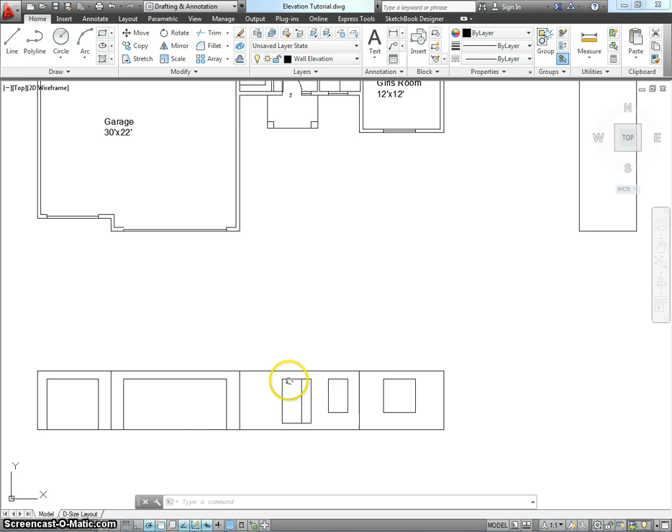Our next step is to start drawing our roof. So what we're going to do is create a new layer, and we're going to call this our roof plan. I'll make it a magenta color, something a little bit different.

So I'll go to my roof plan. Now what I want to determine is what I'm going to do with my roof, and what kind of overhangs I'm going to have. In this case you determine do you want 1 foot overhangs, no overhangs, 2 feet overhangs, 18-inch overhangs - it's kind of up to you. I'm going to go a little bit bigger, I like larger overhangs, so I am going to do a 2 foot overhang.

So when I'm offsetting this, I'm going to click a layer - I'm going to do my current layer that I'm on. I'm going to do 2 feet, and I am just going to break this out.

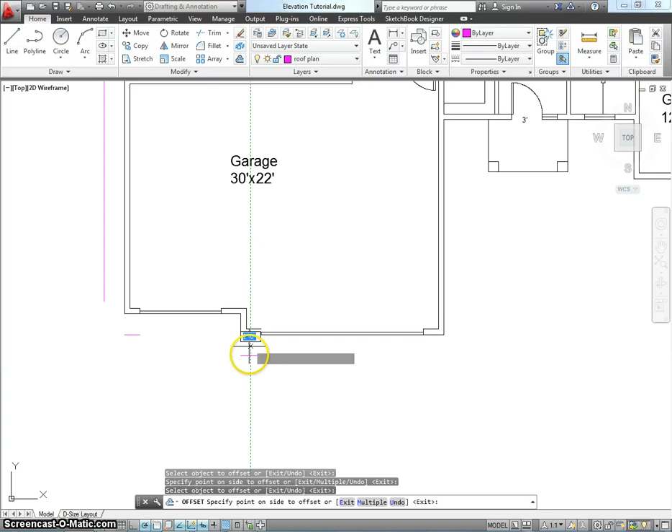Let's see here, I've got one here. There's one, let's see what else we have - so we have front, back, and then over here, over here, over here. Let's see, we've got right here, right here. I'm going to put all these together in a second here, so I think I've got what I need.

Yep, so I'm going to go ahead now and actually fillet these, make sure I have a 0-radius fillet. I'm going to do multiple, zoom in here, fillet these two together.

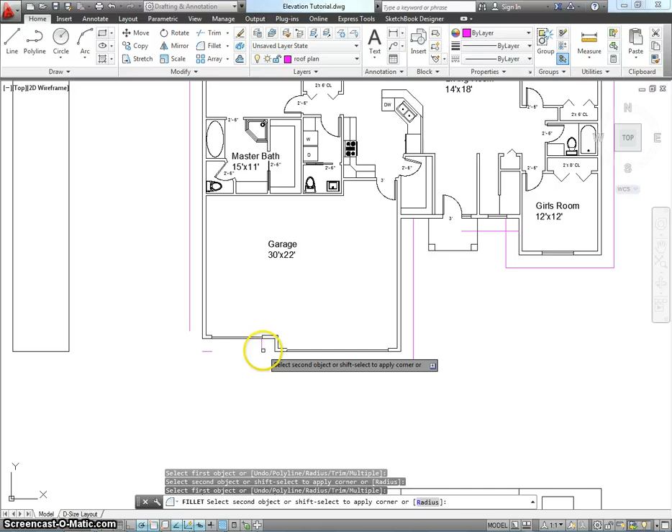Alright, now I've got this, I'm just going to extend this line over, and do the same thing over here. Okay, so now I kind of have my 2 foot overhang that I want on all sides. It's a little bit bigger naturally about right here and right here - I'm kind of taking a shortcut and just saying I'm going to leave that.

So now for my overall house, what I want is a roof slope that actually goes from here - it's a gable end - from here to this line right here, so from here to here. So that is actually where I want to draw probably my first ridge line.

So to do this, I'm going to figure out what my distance is between these. So I've got 34 feet and 7 inches - I'm going to write that down, 34 feet and 7 inches. Alright, so now I'm going to offset, and I'm going to offset something half of that, so 15, 16, that's 17 feet and 3.5 inches here.

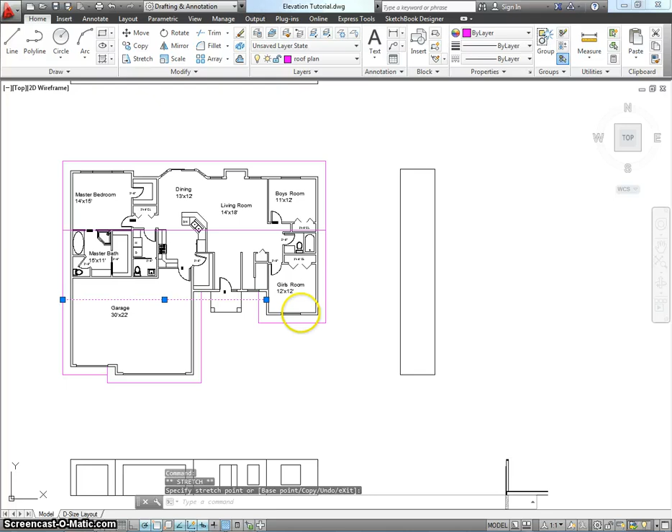So I'm going to go 17 feet and then 3.5 inches, and I'm going to go from here to there. Okay, so essentially what I have now, if I extend this over to here, and I extend this over to here, is I have my gable roof.

So you imagine folding a piece of paper, and this is the fold line that's going through - you're folding in half down the long way, and that is what my roof plan is going to look like on that side. Now what I'm doing is I'm actually going to be adding in some gables that intersect to my ridge lines that create kind of a cool looking effect here.

So let's see here, what I'm going to do is my front here - this is a pretty easy one - goes from here to here. I actually want my ridges to meet up here, or at least that's my first idea, so I'm going to have one go from here to here.

Now this is a very important corner now, because this is the end of our roof and this overhangs a little bit. So what I'm going to do here is actually bring my valley line from there to right there.

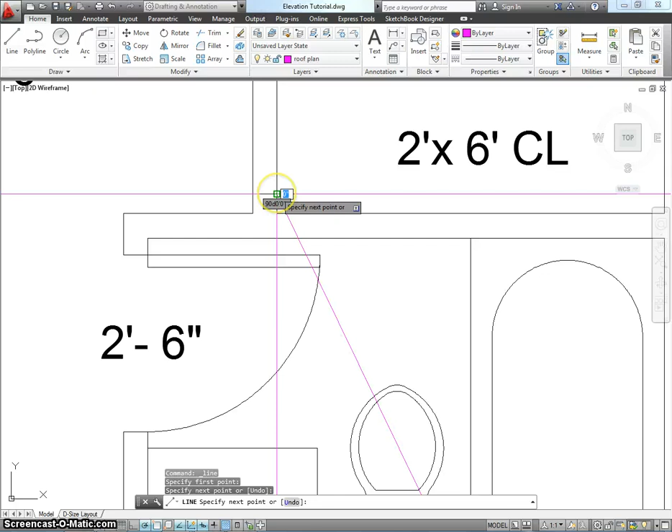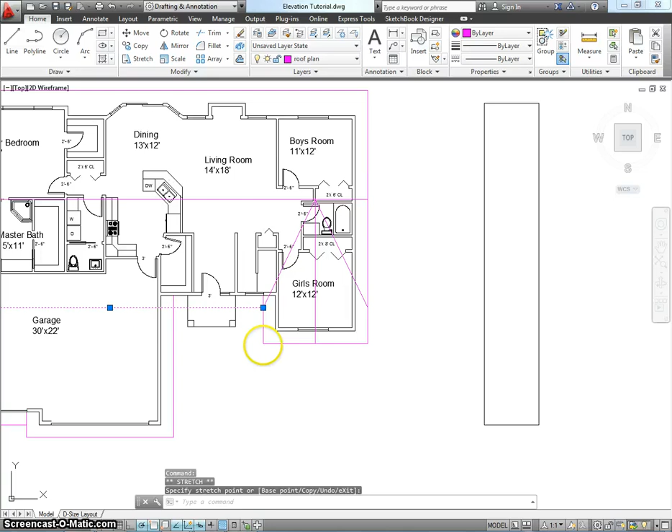Then I'm going to bring my valley line from right here to this side. And if I just move this line back over here, now I have my roof and I have a gable that intersects where my ridges are at the same height. So naturally, if you look at it, my run on this side is going to be less than my run on my overall gable. So this would actually be a larger pitch, but I wanted to keep things roughly the same size.

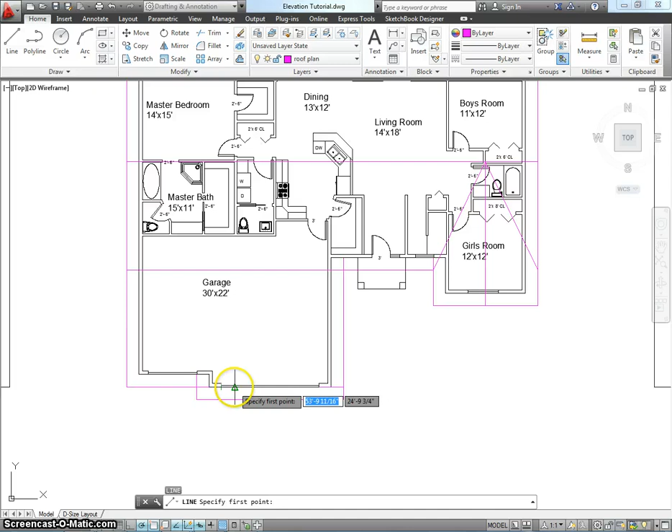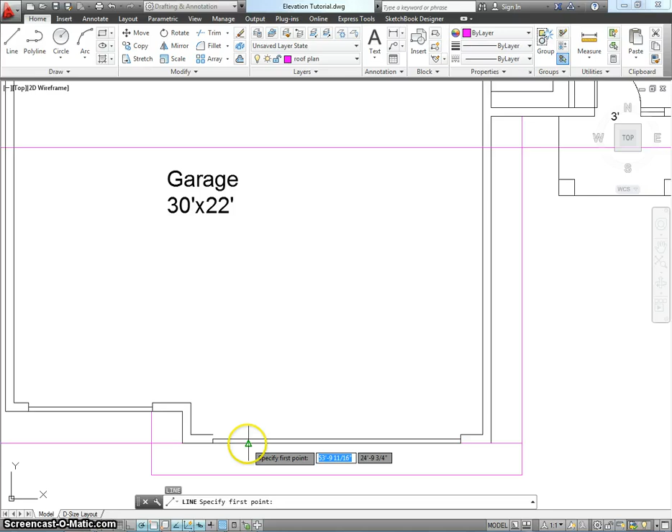So now that I have that, I'm going to do the same thing over here. What I'm going to do is imagine this line goes all the way through. Now that I have that line, I am going to bring a ridge line once again all the way through. Make sure this is 90 degrees. That's not 90 degrees. Try that again here. Alright, there looks like 90 degrees.

So there's that, okay. That's going to be my ridge line for that part of the roof. And what's going to happen is this is going to come down also and intersect with a few things. And then I have this portion right here, and this portion I'm going to do the same thing. This is actually going to go back to about right here. So what I have here is this is going to go up, then it's going to go down, it's going to meet there. This is going to go back.

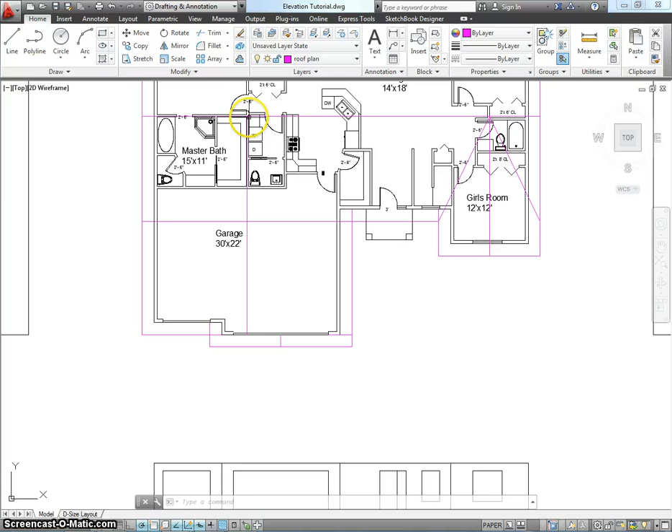Now what I have to do is figure out where this is going to end for me. So I'll have a valley line that comes down, and my valley line here is once again going to come down to where my overall roof, my large overall gable roof, ends, which is going to be right here. And then I'll have another one that goes from right here to that section.

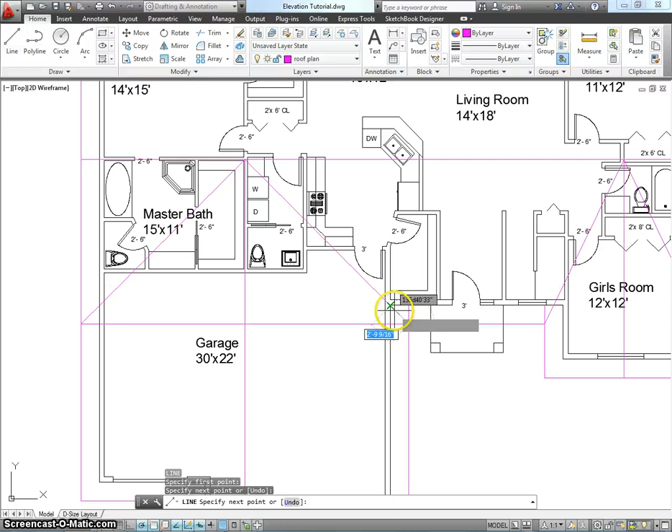Right there. So now what I have is my overall gable. I have a pretty large one that goes over the roof, a little one that goes over this portion, goes back to the wall of my garage, and then I have this one over here.

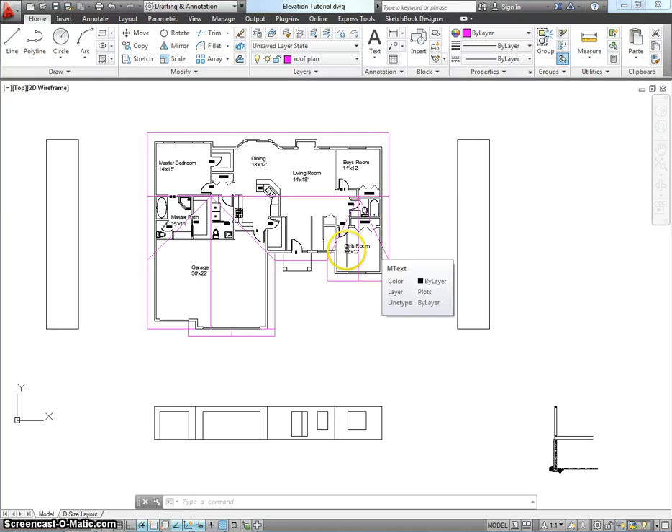So generally that was a really quick tutorial on doing the roof. This section right here, this little line that you see, this would come back out here as this roof would now come down. So you can see there's actually kind of one large flat shape in the back, and over here there's 1, 2, 3, 1, 2 for this roof, 1, 2 for the large garage roof, and the 1, 2 over. Essentially, that's what this is going to look like, I'll give you an idea. I'll open up the finished product.

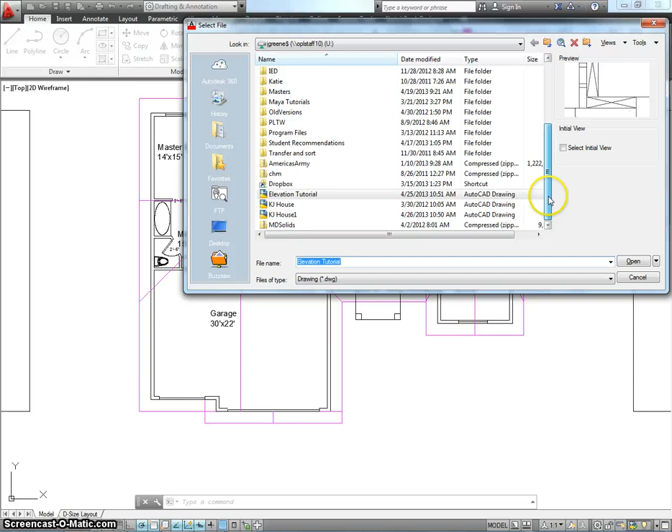So if we go to the finished product here, mine, I actually did a little bit differently here, but you can see that the back is there. I had one over the garage. I had that little one that I showed you right there. And then right here I had one that went over.

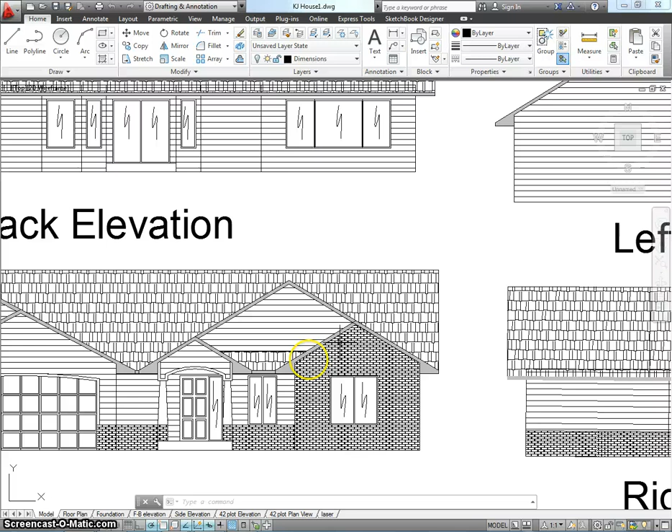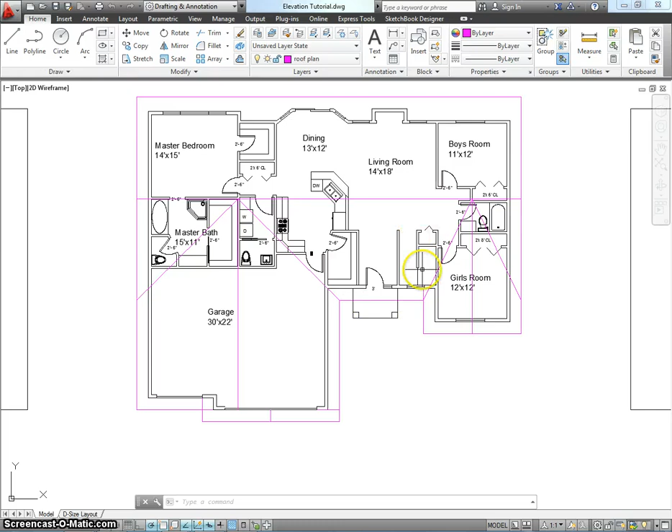And then if you wanted, you could create another one that goes over the roof. You could do a lot of different things to really, you know, make your house, break it up, give it some layered effects, kind of make it look pretty there. But this is one way to do it, you can do it other ways. I have a porch that comes off here, so I might come back and add a roof on there, and then this would still slant down, so that wouldn't be an issue. So that's my roof. You want to try to keep it as simple as possible.

This is going to lead us into our next tutorial, which is going to be taking what we see here and finishing it over here on your typical wall section.